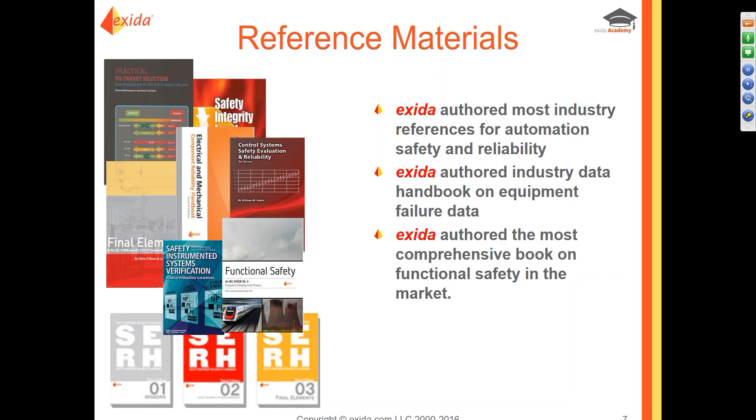So let's get into why you're here today and the awareness of safety culture and what Exida is doing about it: the Site Safety Index. We are going to break it up into 4 major topics. We're going to start with an overview and the impact of Site Safety Index on random failure rates. We're going to look at the realistic PFD average calculations. We're going to then move into the impact of a good safety culture on life cycle costs. And finally, we're going to look at the changes to the Exida FMEDA report and how we capture what is going on with the site safety index information we are using.

So you may be sitting there wondering right now why we're saying site safety index instead of maybe company safety index. Well, as I said before in the introduction, it is actually pretty well documented that a safety product may exhibit a safety performance less than or even better than specified by the manufacturer or the FMEDA. And we noticed that that was happening from company to company, and we started taking note. Then what really piqued our interest was when we were within the same company looking at it from site to site, and that there were differences from actually site to site.

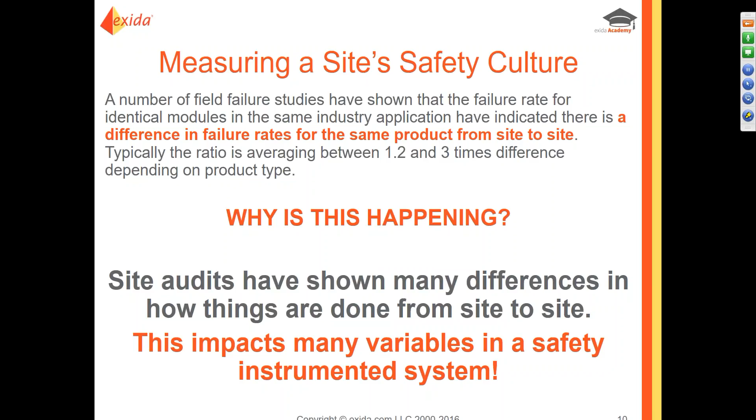So without proper safety culture at a site, having certified products really won't matter. You can have the best device in the application, and if you're not doing the correct things, it doesn't matter if that device is certified or not. This is because human factors play a part in safety system performance. There could be imperfect repairs, improper calibration, faulty installation, not doing the repairs in a timely manner, and many other factors that contribute to the decrease in functional safety performance.

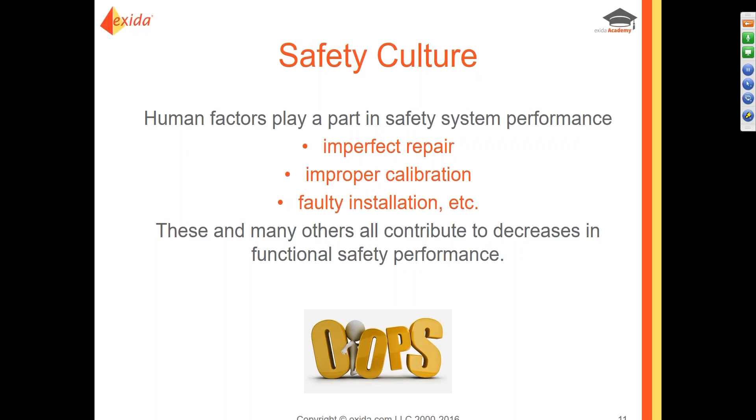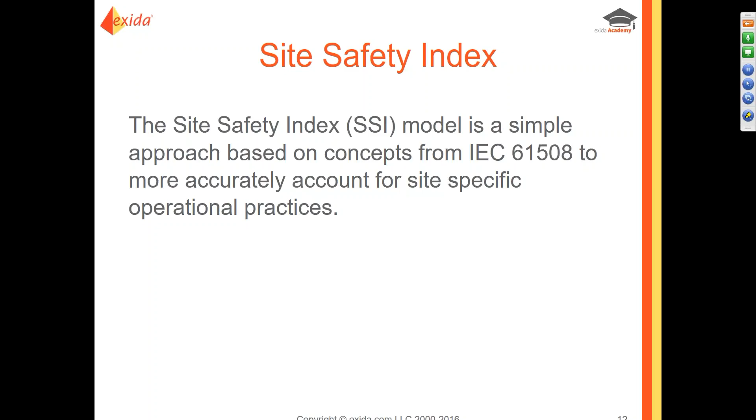So what is the Site Safety Index? Well, the Site Safety Index is a model of a simple approach based on concepts from IEC 61508 to more accurately account for site-specific operational practices. And the Site Safety Index is used to adjust the safety metrics computed under the assumption that human factors play no part in safety system performance to reflect the effects of real human factors on that safety system performance. And this can be broken down on a site-to-site basis.

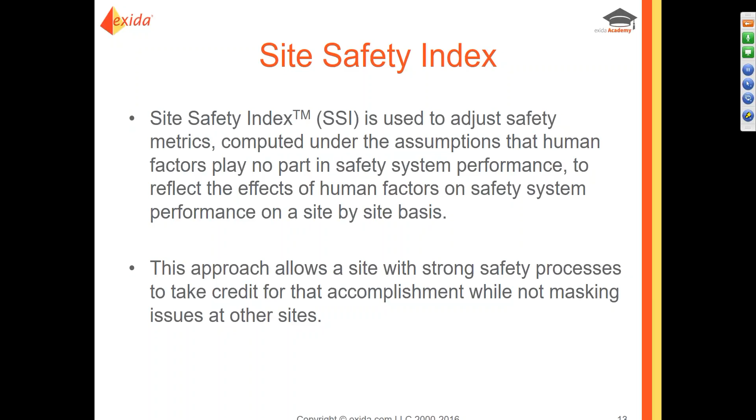So this approach allows a site with really strong safety processes, they're doing everything right, they're doing everything on time, well, you can take credit for that accomplishment. That is a big deal, and we don't want your site to be punished because of other sites in the company. We don't want to mask other issues at other sites, but we want you to have that accomplishment be reflected in your safety calculations.

So there are currently two ways that the Site Safety Index can be evaluated. There's an external audit, which provides the most accurate measure of the Site Safety Index, and also a self-administered questionnaire, which relies on less information than the audit, and it provides an approximate measure of an SSI.

So the first way, an external audit. What goes on? Well, the international standard IEC 61511 lists the requirements that must be met for the entire safety lifecycle process. In an on-site audit, it can be verified that the site meets these requirements in combination with additional detailed requisites for the operations and maintenance activities.

Additionally, all the safety and lifecycle procedures are audited to make sure that the procedures are adequate to support the requirements and also that they are being correctly followed at that site. You can have all of the perfect procedures to meet every requirement, but if they're not being followed, who really cares? The outcome of this audit is a report which includes your Site Safety Index score obtained, as well as recommendations for changes or future improvements. The interpretation of the measured Site Safety Index level itself we will get to later on in this webinar.

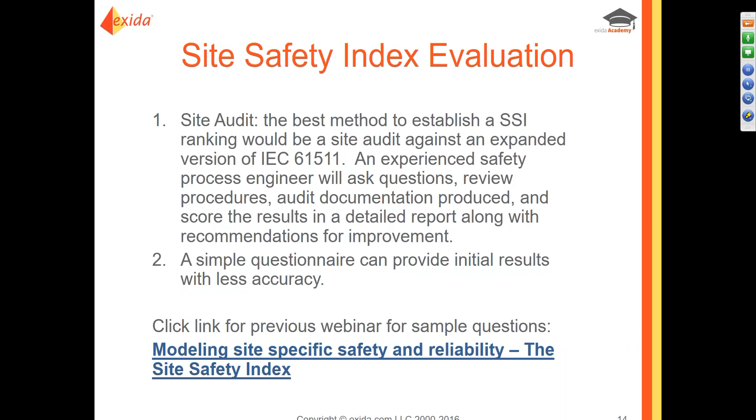So these questions cover various stages of the life cycle and various activities and practices spanning a portion of the life cycle of the SIF. It can be broken down into installation and commissioning, safety validation, operations and maintenance, SIF modification, and finally decommissioning. So here's a look at a few of the sample questions for just the operation and maintenance phase of the life cycle.

The complete set of questions can be made available and is in our exSILentia tool, as well as some white papers. You go through and answer the questions by saying always, often, never, or not applicable. The questions are weighted by subject according to which ones are more important. The total score received determines an approximate safety index level for that site.

The validity of using the questionnaire for determining a site safety index is based on the accepted practice per IEC 61508 of using a questionnaire to determine the beta factor that describes the extent of common cause failures to be modeled when evaluating the safety performance of a redundant SIF architecture.

So if you look through these sample questions, just to get a little idea of what we will be asking, looking at your maintenance records of proof tests: Are the as-found conditions reported? Are the results of the tests and inspections reported? Do you repair any deficiencies found during the proof test in a safe and timely manner? Are your proof tests performed on schedule? Is the frequency of proof tests decided using your PFD average calculation? These are just a few examples from the operation and maintenance phase.

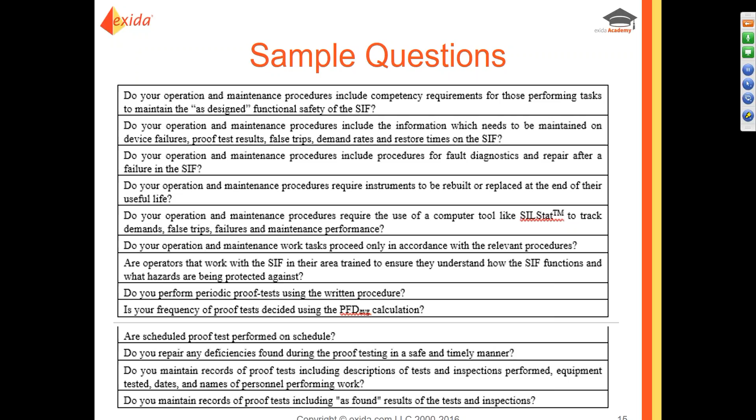Level 4 implies that every single requirement of IEC 61508 and IEC 61511 is met at the site, and therefore there is no degradation in safety performance due to any end user activities or practices. The product is completely inherently safe, and if it needs to perform its safety function, it can at any moment. It's saying that you're perfect, that repairs are always done correctly and on time, the testing is done correctly and on time, and equipment is always replaced before the end of useful life.

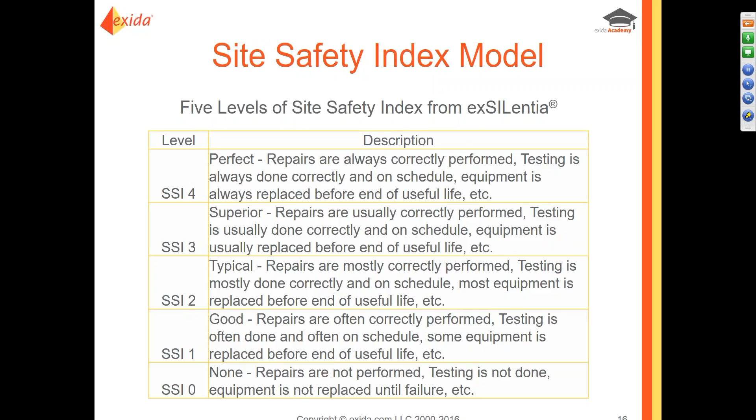The Site Safety Index modifies key variables such as device failure rate, proof test effectiveness, etc., which all impact the PFD average, the SIL level, and the risk reduction factor numbers, as well as other safety metrics. In this example, the computation was performed under the assumption that the Site Safety Index is level 4, 100% perfect on everything, always. Thus, any end user activities and practices will not compromise the safety performance of the SIF.

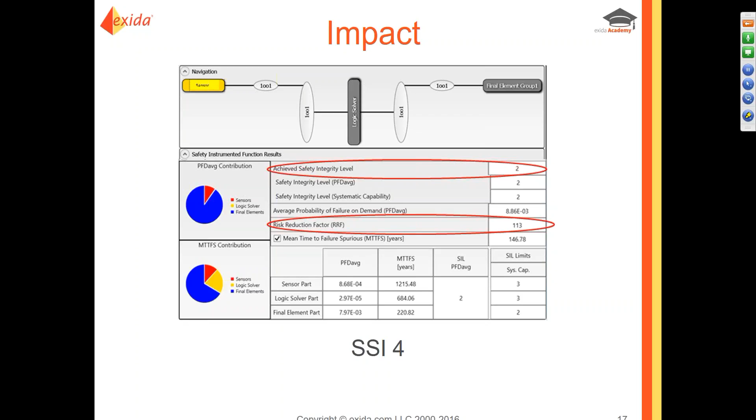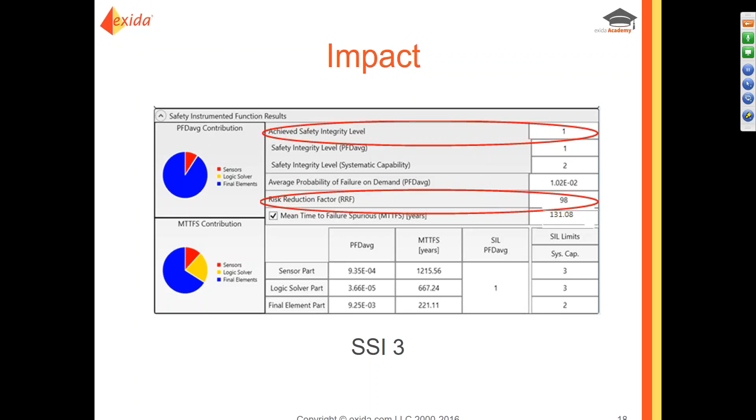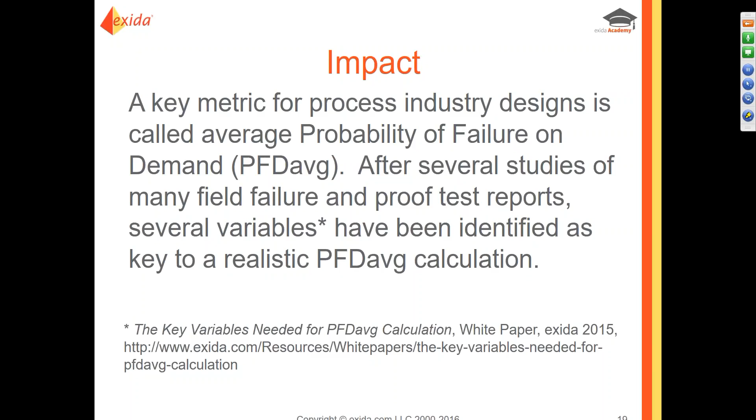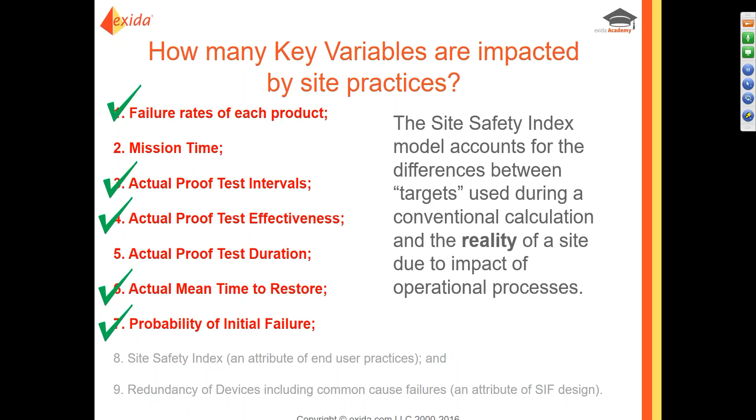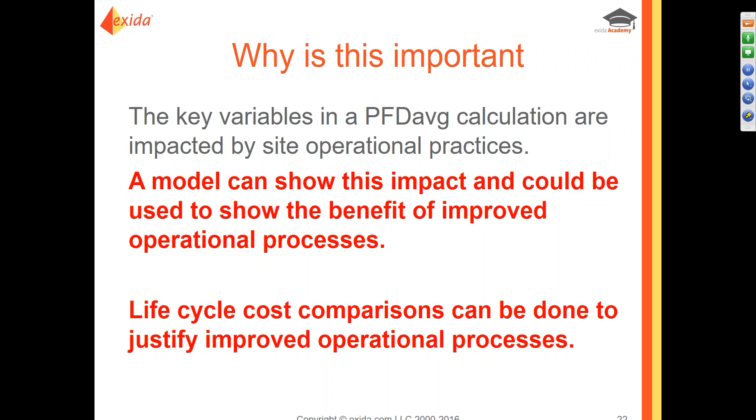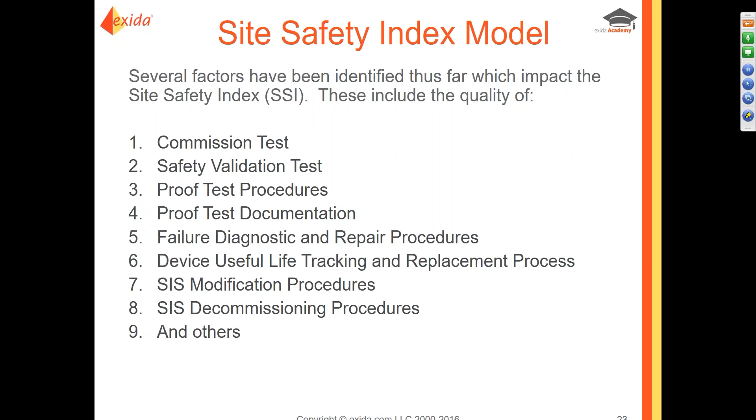So several factors have been identified thus far which impact the Site Safety Index, and these are shown in the FMEDA report and also in exSILentia. The commissioning test, safety validation test, proof test procedure documentation, the failure diagnostics and the repair procedures, device useful life tracking and replacement processes, SIS modification procedures and decommissioning procedures, and many others. So how are these key variables impacted by site practices? Well, you have the failure rates of each product, the actual proof test intervals, the actual proof test effectiveness, the actual mean time to restore, and the probability of initial failure.

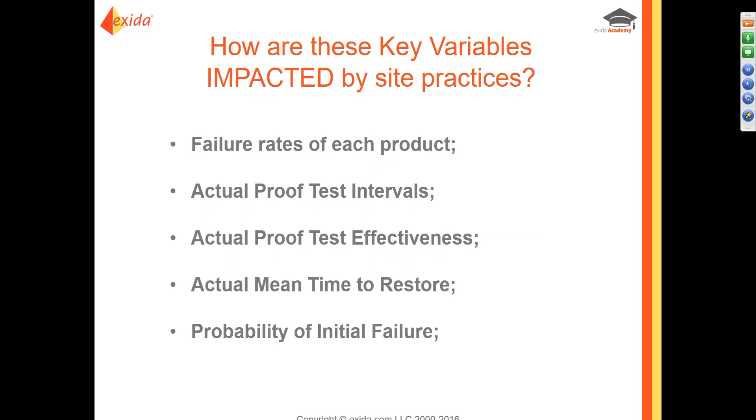So we're going to look at each of those a little more in depth. First of all, we have the failure rates, and we're going to look at how they increase the lower your site safety index goes. So your FMEDA failure rate predictions for each product assume that the products are installed in an environment that has been verified according to the manufacturer's specifications, that the products are chosen with materials compatible with any process chemicals, and that the products are commissioned and calibrated according to the manufacturer's instructions.

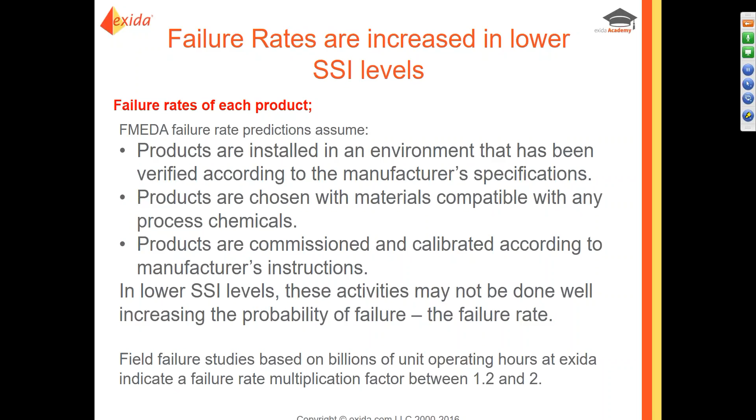But in a lower site safety index level, think of that site safety index of 0. Nothing is being done. These activities are probably not being done in a site safety index of 0, maybe not even in a site safety index of 1. So that increases the probability of failure, thus the failure rate. So a field failure study based on billions of operating hours indicated that the failure rate multiplication factor was between 1.2 and 2.

Next, the proof test intervals increase. In site surveys done by exida, it was apparent that proof tests were postponed in sites where a high level of operational discipline was not present. So the actual proof test intervals are increased in lower SSI levels.

What about the effectiveness? Proof test effectiveness decreases when procedures are not clear, or the test personnel do not have sufficient time or sufficient training and/or documentation to do the testing. So the actual proof test effectiveness is decreased in lower site safety index levels.

The mean time to restore is increased. So the mean time to restore may increase when diagnostic procedures are not well documented or understood. The mean time to restore will increase when proper tools are not readily available.

Some restore efforts will not be successful when personnel do not have sufficient time to perform, or they do not know what the documented results should be. Their training isn't there. Then a second effort is needed to do the same job. So the actual mean time to restore is increased in lower site safety index levels.

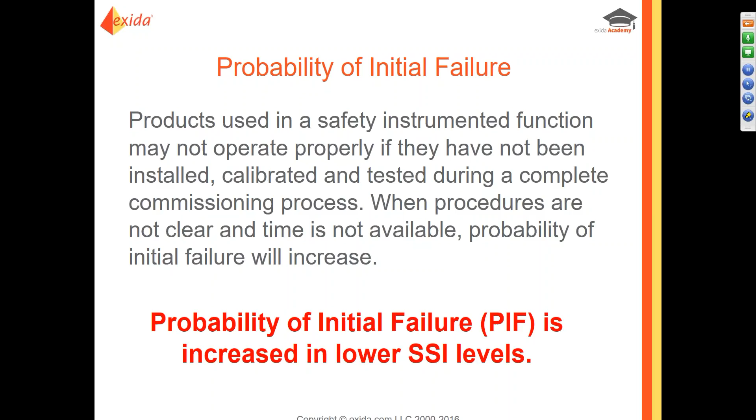And the probability of initial failure. So products used in a safety instrumented function may not operate properly if they have not been installed correctly, if they have not been calibrated and tested during a complete commissioning process. When the procedures are not clear and the time is not available or the training was not done, the probability of initial failure will increase. So the probability of initial failure is increased the lower the site safety index levels go.

It is known that final elements are more likely to be negatively impacted by less than ideal end user practices than, say, a sensor or a logic solver. By increasing or decreasing device failure rates on an individual basis, it is possible to more accurately account for the effect of site practices on the safety performance.

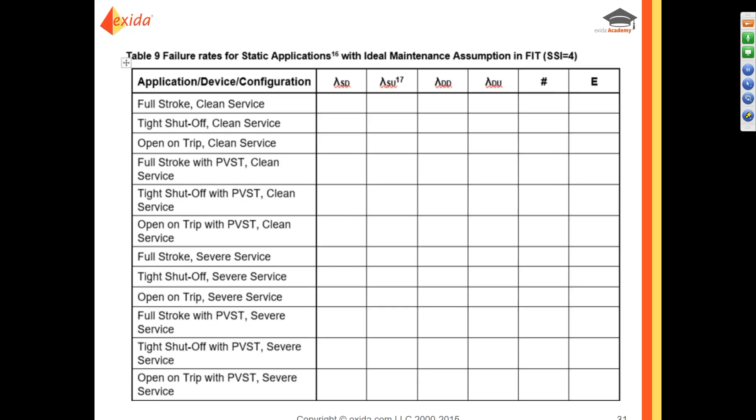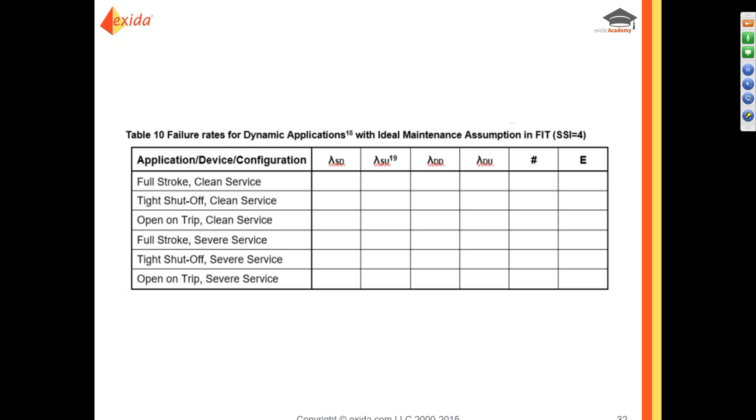So you'll see the regular failure rates in the main body of the report. You come back to the appendix and you'll see what it would be for a site safety index of absolutely perfect. And then we also are listing them, if applicable, for dynamic application, so something moving often and not in a low demand mode of operation.

So what should you take away from this? Well, the site safety index will produce more realistic PFD average results. Compared to simply adjusting the failure rates, this approach allows a site with a strong safety process to take credit for that accomplishment while not masking issues at other sites. It can show the impact of different operational policies, could be used to show the benefits of improved operational processes, and it can be used to justify improved operational processes.